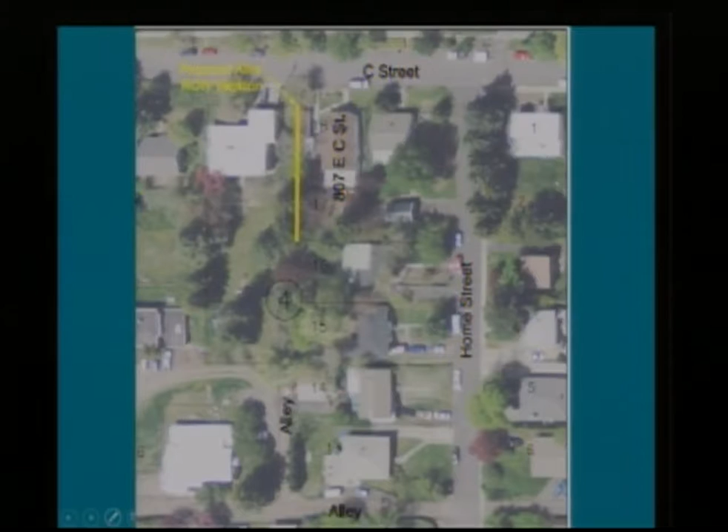At any rate, to the extent that this change would affect my property, I'm concerned. We also had a fire in one of the trees a few years ago.

I called the city. City called Avista, and there was a smoldering fire because one of the lines, the live wire, fell and set the tree on fire. Avista had to come out and repair that. With all their personnel, they needed the full extent of this right-of-way.

I'm concerned also that—I've met my neighbors and I like them very much, but I think this is not in the public interest. There's an historic reason why this right-of-way has existed.

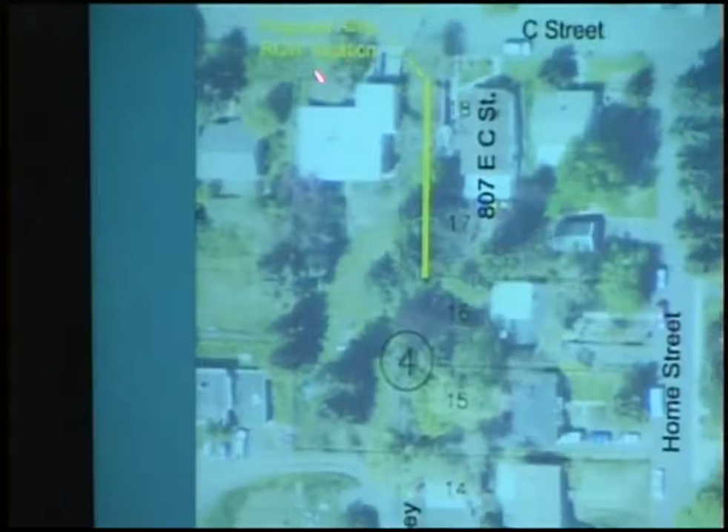Mr. Freeland, I'm going to stop you, sir, because we're over 4 minutes, but I do have a question to ask. Is that the property you're talking about that's yours? Yes, it is. So this is C Street? Yes. So you've got access to your house from the front of the street, isn't that correct? You have access to the front of that house right up there?

I do, yes. The question was about access—you said your lot goes way down into here, and that's what you're concerned about, these trees right here. Correct.

Also, in the lower basement of my home is the furnace, there's a kitchen. If those ever caught on fire, I need city personnel to be able to respond appropriately. Also, I've read the petition, and I'm concerned that this is really not in the public interest, but is unjust enrichment. I don't know if the city really has the legal...

Mr. Freeland, I'm going to ask you to stop. You've talked for over 5 minutes, and I restricted testimony to 3, so I gave you plenty of time, but I did have a question I wanted to ask you. Thank you, sir, for your testimony. I would be more than happy to take other testimony up front here.

Mr. Mayor, City Council, John Freeland. He's my dad—I grew up in that house there. I think the bigger issue here, beyond the city right-of-way, is that the lot right behind the house could potentially be divided for another house in the future. If their request was granted, I'm not sure that the alley could still be constructed.

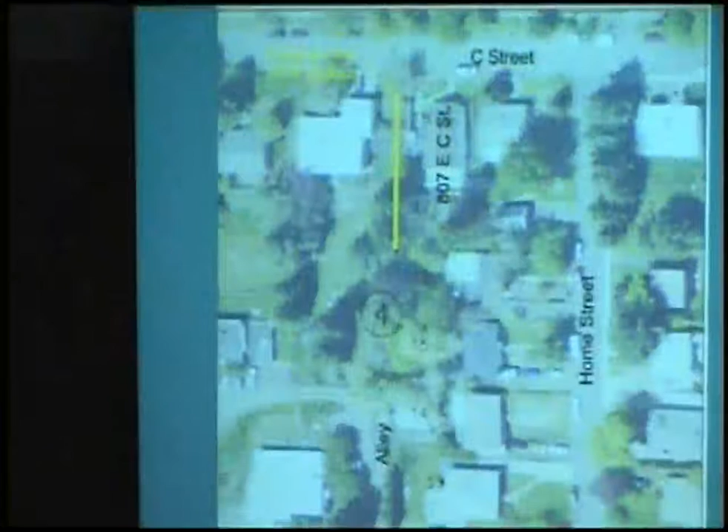You can kind of see the line there right before the gravel, 3/4 of the way down the picture there. And there's no fire hydrant anywhere near the southern part of the property. So in terms of fire access, for us to potentially seek to divide the property in the future and get value out of that piece of land, as the guy next door said, in a tight housing market, potentially building another house there, having a different property there. In terms of fire access, we need to have the alley preserved as it currently is.

So I would ask Les if, potentially, that 1 foot would restrict fire access to that property, and that might be a question for the new fire chief as well. So I just wanted to bring that up. I'm in opposition until I hear a good argument or my concerns are addressed. So thank you so much.

Thank you, John. Other testimony? Okay, I'll close the hearing. Oh, no, we have somebody coming. Come on up, ma'am, if you want to. Tell us your name and your address, please.

Hi, my name is Mary Ingles. My husband is Eric Milstead. So I'm petitioner on this request. Just a couple of points of clarification, I think, and perhaps this is really a question for Les. I believe that the access to the fire hydrant, that is city property that goes from the front of our property to the edge of the street. And so in my understanding, there would be no restriction or restricted access to that fire hydrant. Is that correct? Go ahead, Les.

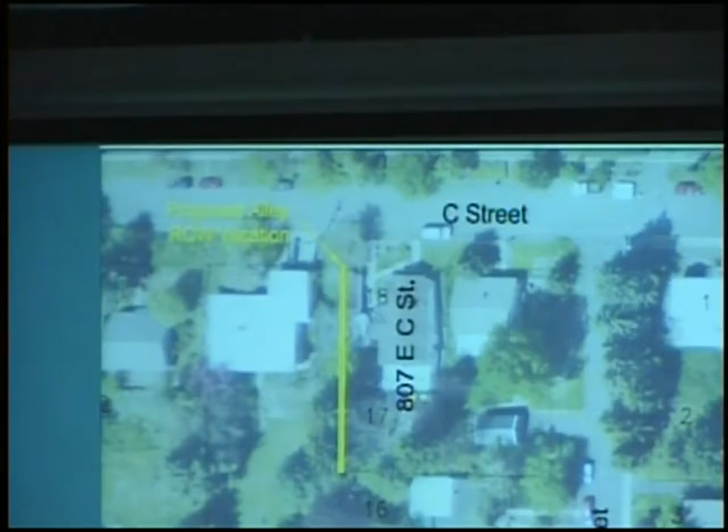Well, all those properties currently have fire access from C Street, and the fire truck could reach the majority of that property from C Street, and maybe using some of the alley for personnel, but not necessarily for fire vehicles to gain that access. So they have the access they are required to have. The question would be, if you develop something on the southern portion of that property, could you gain adequate fire access for the fire department to approve a new structure being placed there? Currently, under the fire code, that fire access has to be a minimum of 20 feet in width.

Okay, let's turn it over to the council. I just wanted to get a few of those things verified. Jim? I have a question for Bill.

If they were to divide this lot out and then provide access from down this way, the alley would not be suitable? It would have to be converted to a city street or city right-of-way? Correct. That would not satisfy the requirement of the lot having frontage on a public street. We did pass an amendment a few years ago to exempt out a few pre-existing legal non-conforming lots that only had alley access, but that did not grant the allowance of creating new lots that only had alley access.

So they would need to somehow accomplish that flagpole minimum 20 feet of frontage. It doesn't mean they couldn't develop on the rear portion of the property. In the R3 district, you can have multiple structures on that lot, but they just couldn't separate it and divide it off as a separate lot. And they may not be able to develop on that southern portion of the property unless they can provide adequate fire access in some form.

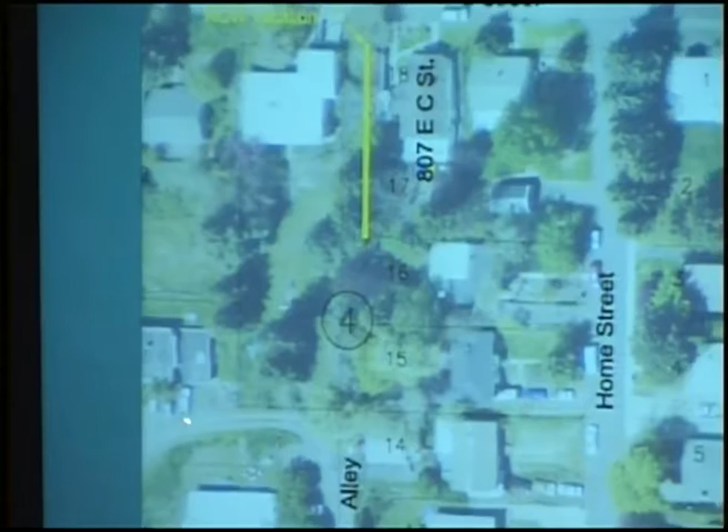How close is the fire access on this end? Well, one of the things to keep in mind here is what you see in this area. This is not an alley, this is all private. So the 16-foot alley we're looking at comes from C Street and extends all the way down to this intersection with an east-west alley here. That is the extent of the public right-of-way within the plat.

And there's a portion of this being used as a driveway, serving these couple of homes, that is gravel today. I'm not sure how much of that's actually in the alley right-of-way. Looks like it kind of drifts into this adjacent parcel here. So that would be the other access point to this alley, and potentially to a southern portion of this lot, where if fire service could come through here and possibly come some distance up this.

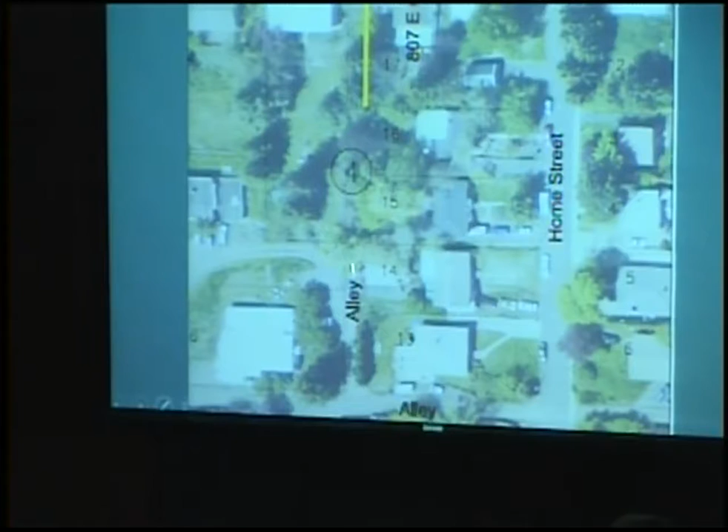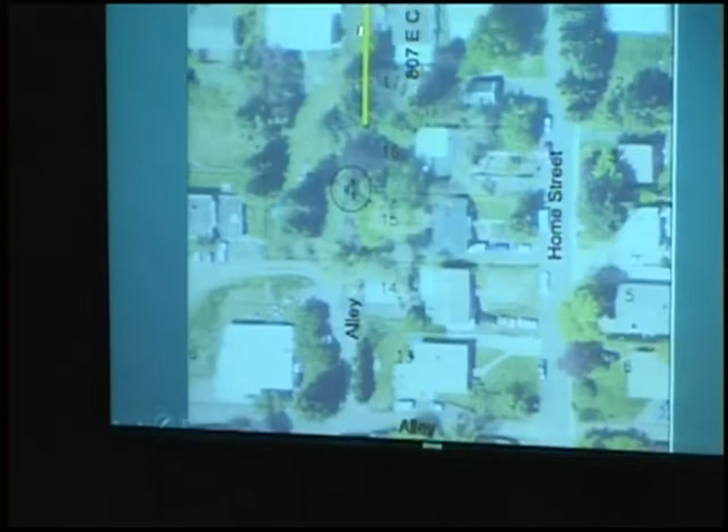I'm not as familiar with the topography down here, but I'm assuming since it's being used, it's probably not too steep compared to this pretty steep section right about here. So that would be the other closest point for potential fire truck access, if they could come in here, possibly up a little ways, and help cut that distance. Again, probably for personnel to go from the vehicle to the site, as would be the case here. You're not going to bring a vehicle down this area as it exists today.

Is the width of the alley down here the same, or is it wider down here? No, it's 16-foot right-of-way all the way through. All the way through? Yeah. Okay.

Okay, Bill, you mentioned that a flagpole lot can't be more than 150 feet long. Do you happen to know the plot size there? Well, the vacation request is 110 feet in length, is that correct? So that yellow line gives you the general reference, but I don't know the full length of that entire lot.

As I recall, each of these lots is 50 feet wide in a north-south direction, here, here, and here. And then the last one is 60, thus the 110-foot combination in that area. So from that point it would be approximately another 100 feet down to what I believe is their southerly property line, so it might be that 210 parcel feet in length overall, about 210.

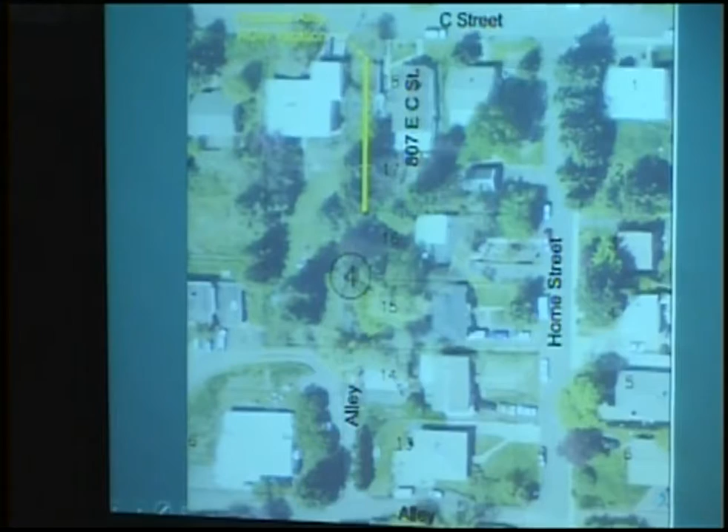Randy? So am I understanding correctly that currently they would not be permitted to build on the southern part of that lot, and the only way would be if that alley were to be converted to a city street at some point? Well, I would clarify, they could build on that southern portion if they could provide suitable fire access acceptable to the fire department.

So there is a difference between dividing it off as a separate lot for sale versus adding another structure on that existing lot. You couldn't divide another lot off for sale unless you could somehow get that minimum 20 feet of street frontage for that lot in a flagpole configuration. If you could not achieve that, you could place another structure on that lot. The R3 district does allow multiple structures per lot, but you could not get that new structure permitted unless the fire department approved adequate fire access to provide fire suppression services to it.

Right now, all we have is a 16-foot wide alley where the fire code would dictate that access needs to be 20 feet in width. So either the fire department would have to provide an exception or additional right-of-way would need to be obtained to have that 20-foot fire access width to serve that new structure.

And it appears that if they were to consider an exception, they may prefer the southern approach anyways. That's a possibility. That would be my perception, that just because of the topography, that would be the only feasible approach.

The difficulty you run into is you'll have a structure that will likely be addressed on C Street that is going to be gained off that rear alley. So that's where it makes it difficult, and really why lots need to have frontage on a public street, so if you're responding to an incident, they know where they're going and have access to that structure. But that does not mean access necessarily has to be gained by that street. The fire department would just have to be aware of that and have it in their response protocol.

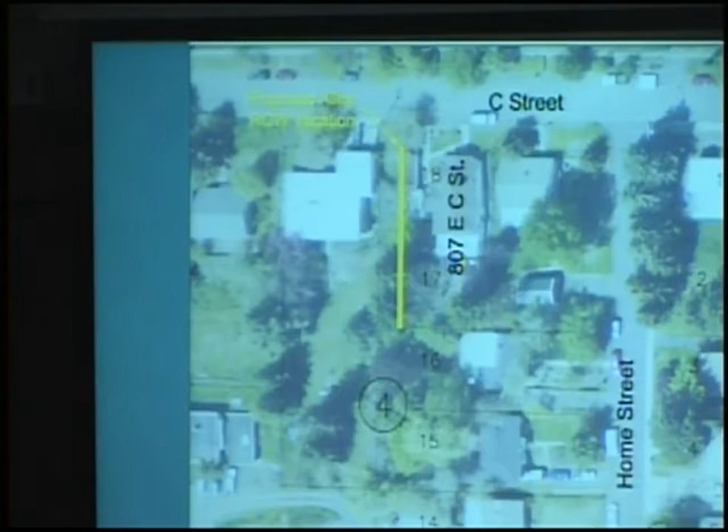Catherine? No questions? Ann? Okay. So how would council like to move forward with this?

I have one other question. Randy? Maybe it's kind of a long shot. I think we're all trying to come up with possibilities, if there are any others. More south of where they're requesting the vacation, in that portion of the alley, could it ever be a possibility in the future for there to be a vacation request for that entire portion to then become a 20-foot wide vacated portion? Well, you still run into the property right here, which is going to be problematic for you as well, Randy. See that line right there?

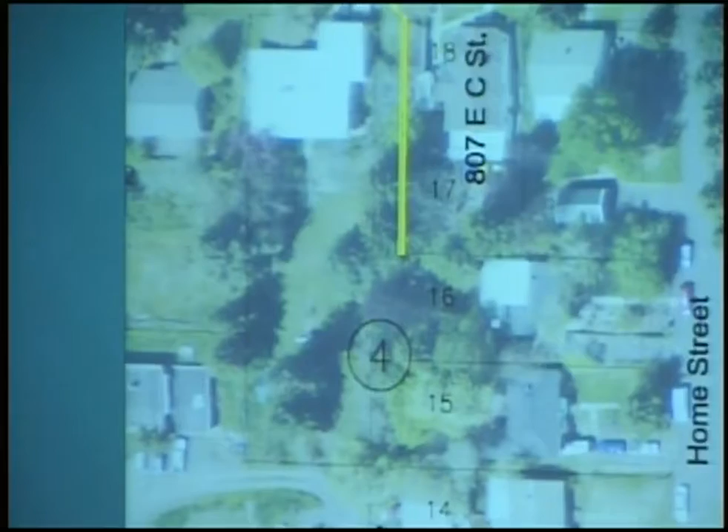Is your question, could there be an additional 4-foot dedication to allow for a 20-foot fire access? Right. There's always a potential that the adjoining property owner could purchase or obtain another 4 feet. Right, that's what I'm asking. And then it would all depend on how they were going to configure it, what the access was, and so on and so forth.

Well, Mr. Mayor, since the existing right-of-way does not meet fire code at this point, and another foot taken off of it doesn't make any difference, I guess I would have to move that we approve the vacation request by adoption of the draft ordinance under suspension of the rules requiring 3 complete and separate readings, and that the ordinance be read by title and published by summary.

Second, with just the correction in the ordinance, is it west or east? Because I heard it's west. Okay, so in the ordinance it says east, I think.

We got a motion by Jim and a second by Catherine to approve the vacation request by the adoption of the draft ordinance under suspension of the rules requiring 3 complete and separate readings, and the ordinance be read by title and published by summary, as long as it's on the west, and I'll take a look at that ordinance on page 10.

We'll start the roll with Ann. Aye. Aye. Aye. Aye. Okay, the vacation is granted.

Let me read this ordinance. This is ordinance number 2018-1. An ordinance of the City of Moscow, a municipal corporation of the state of Idaho, providing for the vacation of a portion of the public alley right-of-way within the City of Moscow legally described in Section 1 of this ordinance, providing that the title of said vacated right-of-way shall vest with the owners of the property as specified in Section 3 of this ordinance, and providing that this ordinance shall be in full force and effect from and after passage, approval, and publication according to law.

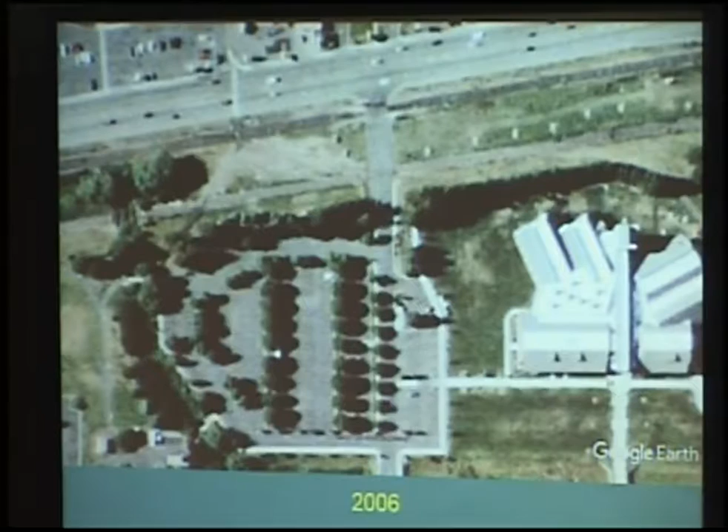And then the university, in conjunction with the U.S. Army Corps of Engineers, reconstructed Paradise Creek here, essentially creating an open channel to complement the underground portion of the creek that runs along Paradise Creek Street down here off the edge of the screen.

And with that, and about the same time, Stadium Way was extended up to the highway, new bridges installed, a new intersection at Peterson and Stadium Way and State 8. And then Rayburn Street, as it existed all those years, was removed.

So the only thing that's still there today, you can just see it right there, that little line crossing, that's a sanitary sewer main that the city owns that crosses from north to south and ties into a big sewer system that runs right through this area.

And so with the creek, then all the crossings went away, the road went away, the pedestrian routes all went away, and that is just a creek. So that's generally, it's 2015, it's the last aerial I had. That is what it looks like generally today.

Vegetation is starting to come to fruition along the corridor. You can still see that sewer line just barely right there. Just to help orient, Wendy's is right here across the way. Drive in, drive out.

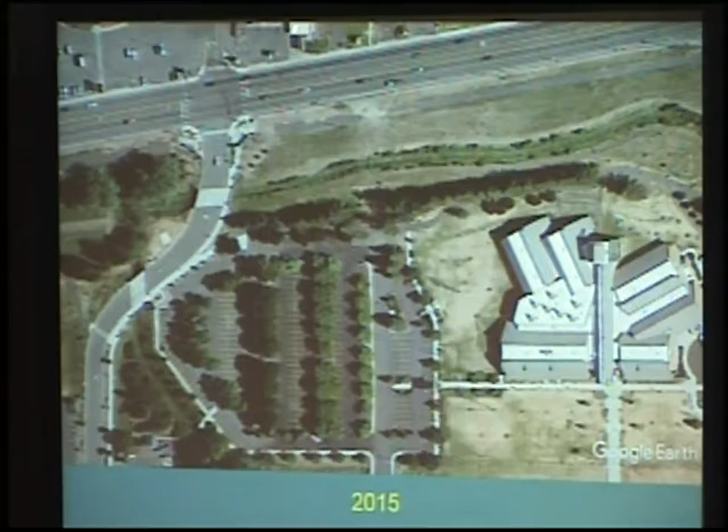And the city acquired this some years ago as the railroad started phasing out, so that it became right-of-way. So the university has requested that we vacate that area. In this case, the university now owns both pieces of right-of-way, the westerly one here, the easterly one here, that abut the right-of-way area on both east and west sides in its entirety. So they own all the property east, west, and south of this right-of-way vacation. To the north, of course, is additional right-of-way for State Highway 8.

So the university is making the request, as they anticipated the city probably has no further need of this for a roadway, that we vacate it. And again, the draft ordinance does retain easements upon the right-of-way for the purpose of utilities.

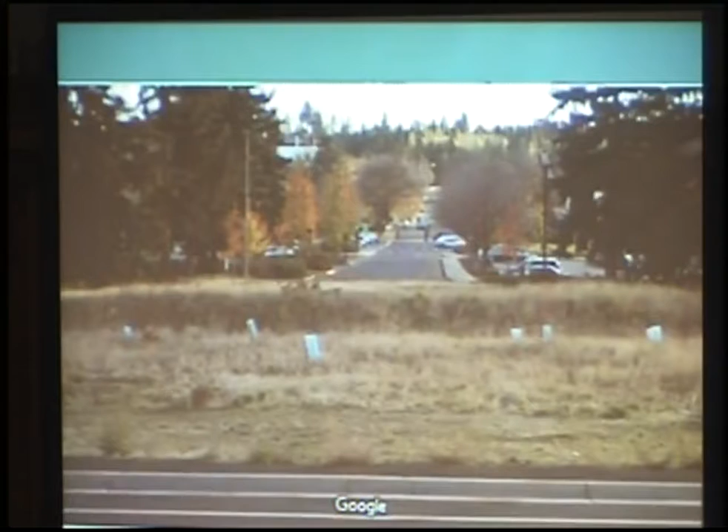Okay, I think we'll go ahead and, oh, were you done, Les? I'm sorry, I forgot I had this one. That was just a rough representation of where that right-of-way would be, before, give or take. So, yeah, that was it.

How much land is it? Ooh, we'll have to look at that. It's actually in the ordinance, in the legal description, right at the bottom. About .31 acres, roughly. Thank you. So a third, a little less than a third. Okay.

I will open the public hearing at 7:44, and Mr. Dan Ewert is here, so the applicant, so please come up and share with us what the university's thoughts are. Dan?

Mr. Mayor, council members, good evening. My name is Dan Ewert. I'm the Vice President for Information Technology at the University of Idaho, and I live at 2187 Westview Drive.

I think Les did a great job of describing what we're requesting. We would hate to see the good work between the city and other groups and us in the development of the riparian zone through there, in the pathway process, ever become a street. I don't think we need that to be a street anymore with the great improvements there on Stadium Drive. And of course, we'd be glad to support any utility easements and those kinds of things as appropriate.

But like I said, I think Les did a great job of describing it, and I'm here to answer any questions that you might have from the university perspective. Any questions for Dan, from anybody? Thanks, Dan. I think everybody's, oh, you got something, Jim? I just wondered if the university has any development ideas for that since it would be a continuous piece now?

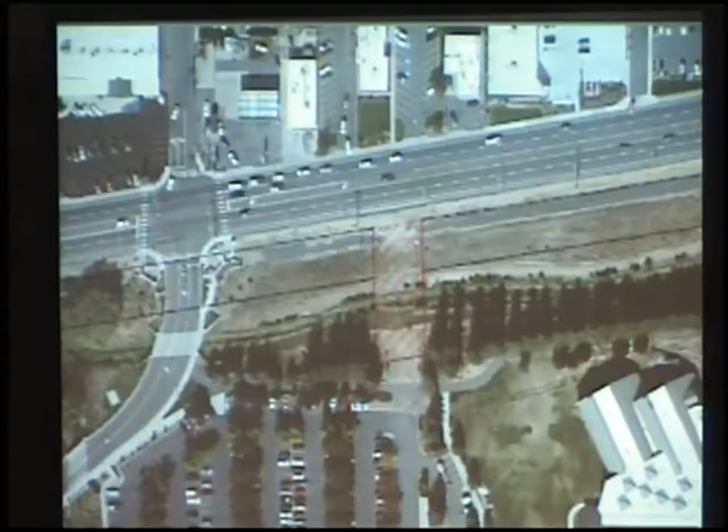So it's not something that the city of Moscow would have control over in terms of access off the highway. Catherine, questions? Okay, Gina? I'm good.

Well, I move we approve the vacation request by adoption of the draft ordinance under suspension of the rules requiring 3 complete and separate readings, and that the ordinance be read by title and published by summary. Second. Okay, we have a motion by Catherine, a second by Gina to approve the vacation request by adoption of the draft ordinance under suspension of the rules requiring 3 complete and separate readings, and that the ordinance be read by title and published by summary.

I'll start the roll with Brandy. Aye. Aye. Aye. Aye. Aye.

Okay, now I will read this ordinance, which is 2018-02, an ordinance of the City of Moscow, a municipal corporation of the state of Idaho, providing for the vacation of a portion of public street right-of-way located within the City of Moscow and legally described in Section 1 of this ordinance, providing that the title to said vacated public right-of-way shall vest with the owners of the property as specified in Section 3 of this ordinance, and providing that this ordinance shall be in full force and effect from and after passage, approval, and publication according to law.

So there it is. Now we will move on to item number 8, and this is a little bit interesting one. Before you get going, Bill, I want to chat for a minute about this because there are 3 actual actions that need to take place here. If you read in your packet, A, B, and C—C being the public hearing—so we have to come to a conclusion on A and B before we can make a decision on the public hearing and opening, because if we don't have those, the public hearing cannot happen. Is that correct, Gary?

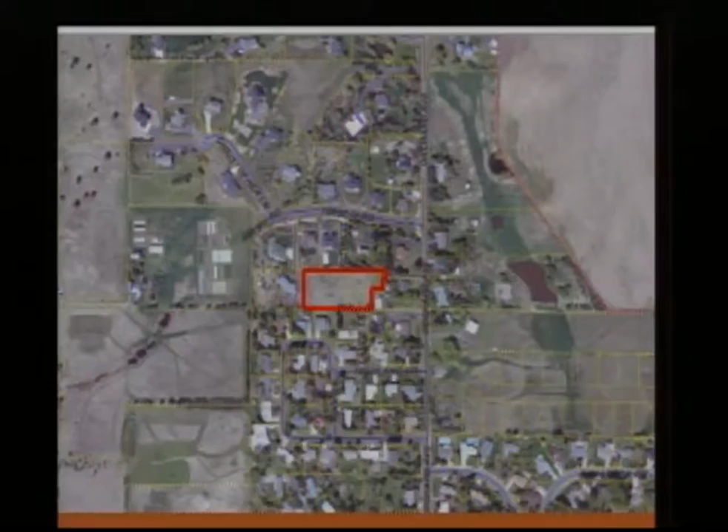So this is the property in question that we're talking about. Orchard Avenue is located here to the east of the property, and Hershey Road is located to the north, and then we have the Highland Drive loop, and then a short stub street called Lande Lane that abuts up to the south of the property.

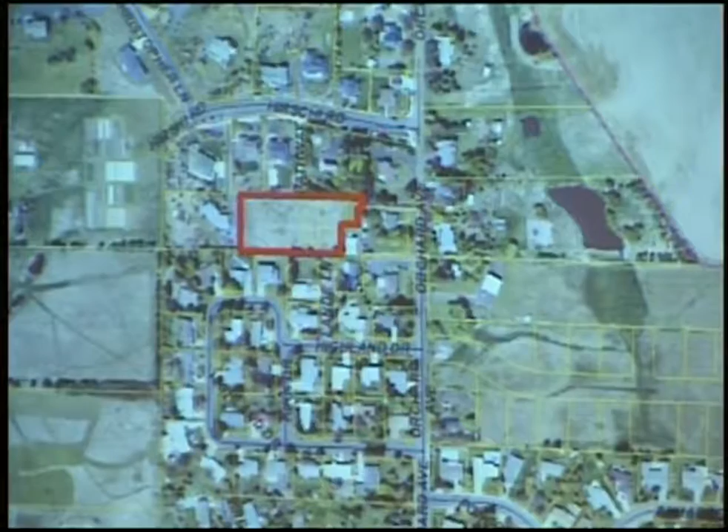The property itself is located within the R2 zoning district, which is our medium-density, single-family residential zone. Most of the properties to the northwest here and to the south are also zoned R2. We have some farm ranch outdoor recreation just to the northwest and to the west of the property, some R1 to the far southeast, some suburban residential for the majority of the Christopher Crossing subdivision located to the north, and some ag forest district off to the west.

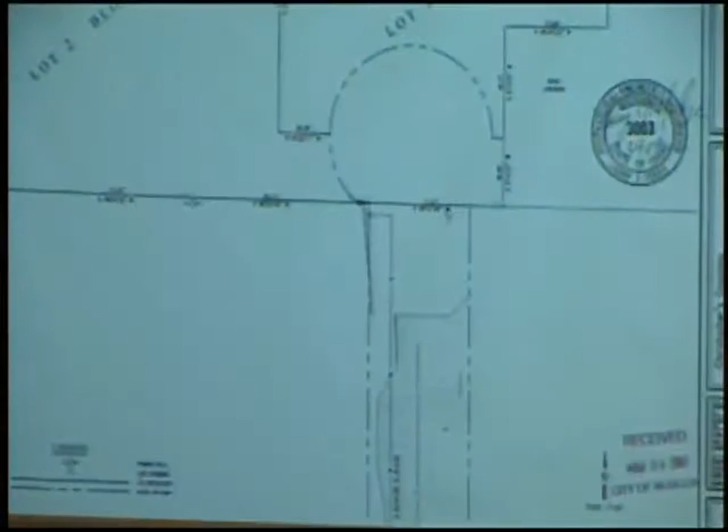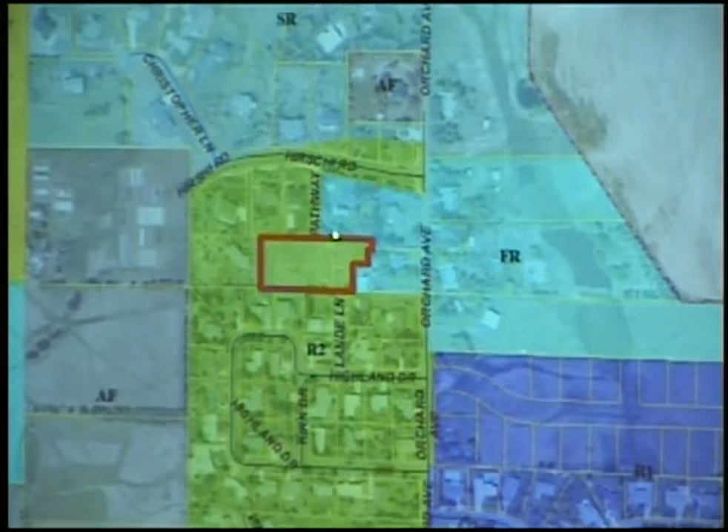Now, this property was a part of the Christopher Crossing subdivision. That subdivision included the lots off of Christopher Lane and Hershey, a few lots in the south, and this was a portion that was tied to that overall subdivision plat when it was developed back in 2000. It ran into some financial difficulties, and that portion of the plat was never completed. The public improvements were completed for the rest of the subdivision, but this little portion was not.

It was proposed to be accessed off the end of Lande Lane, with a cul-de-sac to be constructed at the end of Lande, and there were two lots platted on that portion of the property. Shortly after that was platted in 2000 and the subdivision was completed, this became a property that was difficult to complete. There are some utility lines and grade issues that necessitated retaining walls on the side of the cul-de-sac. The developer at that time and future developers identified that it really was not financially viable to develop that property given all those constraints.

There also are both storm and sanitary sewer lines that need to be extended up Lande from Highland Drive to serve the lots. So there was a lot of development costs and challenges, and developing in just a two-lot configuration was not deemed financially viable.

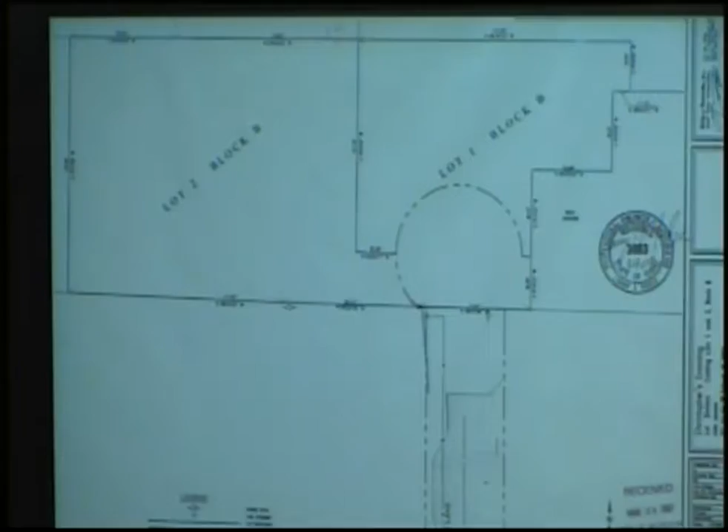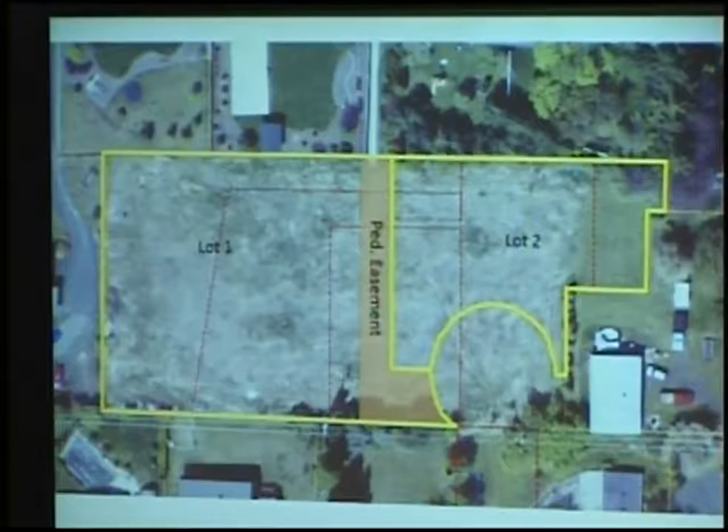In addition to the two lots that were platted, there was also a pedestrian easement that was granted. There is a pedestrian walkway and sidewalk constructed from the street to the north to the northern boundary of this property. An easement was granted to allow that pedestrian path to cross the property, reach the Lande Lane right-of-way, and continue south towards Highland Drive.

After that was determined to be not feasible for development in its current configuration, in 2007 the city was approached with a proposed lot division that would take the two lots and convert them into three. That proposal modified the cul-de-sac to extend the roadway farther north into the property to get away from the utility lines and grade issues, placing the cul-de-sac in a modified configuration located farther north into the property.

There were two flagpole lots that were going to gain access at the northern end of that cul-de-sac, and then a third lot located a little bit farther to the south. So these were proposed to be the three building lots in that configuration. There was also a remnant parcel located on the east side of the proposed cul-de-sac, and the discussion at that time was that it was likely going to be sold to adjacent property owners located to the east of the proposed cul-de-sac. That was approved by the council in 2007.

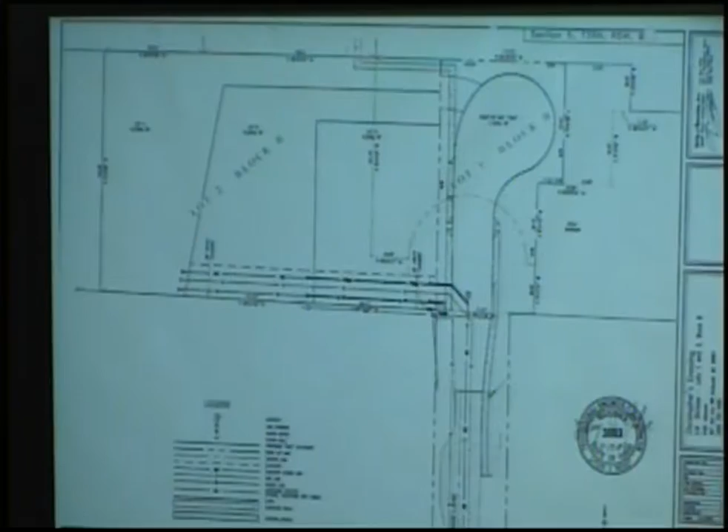There were a number of conditions. One included rerouting that pedestrian easement to allow for continued connectivity of that sidewalk down to Landy Lane. That was approved in 2007 and has really just sat since that time. So this was the configuration that resulted from that lot division: these were the three lots that were approved, and this was that remnant parcel.

There was a pedestrian easement granted here along the northerly property line to provide a pedestrian route to the proposed new right-of-way. New right-of-way was dedicated beyond the prior cul-de-sac to allow for that construction, and there was a small vacation on the side of that cul-de-sac previously platted in the Christopher's Crossing subdivision. So that's how it stands from the last approval. Legally, we have this property in private ownership, this in private ownership, and this right-of-way and pedestrian easement exist today.

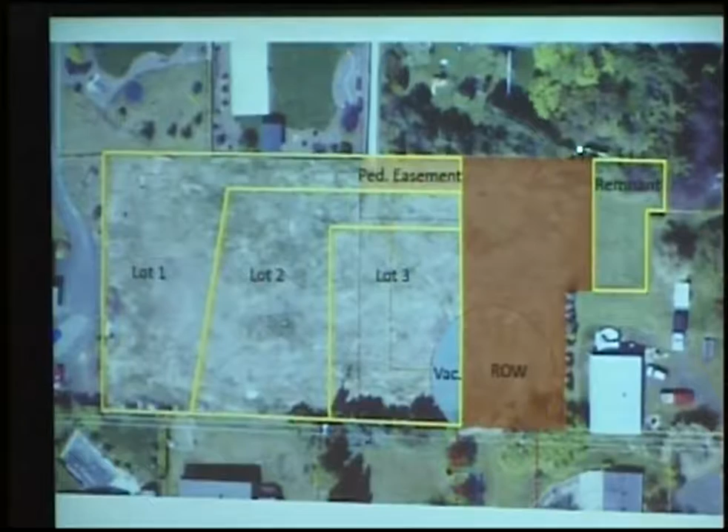The proposal before you this evening is to modify that again, to reconfigure it into 4 building lots with an alternate hammerhead turnaround. That is something the current owner of the property feels will fit the site and make it much more economically viable to develop.

There would be 4 individual building lots, a little more regular in shape, not quite the flag lots that existed previously. The remnant portion located on the east side of the prior cul-de-sac, the request is to vacate right-of-way. That would be added to this property, resulting in a building lot.

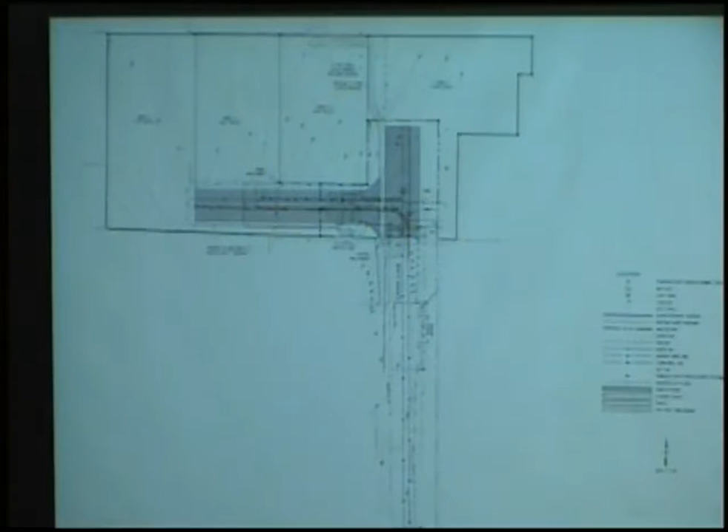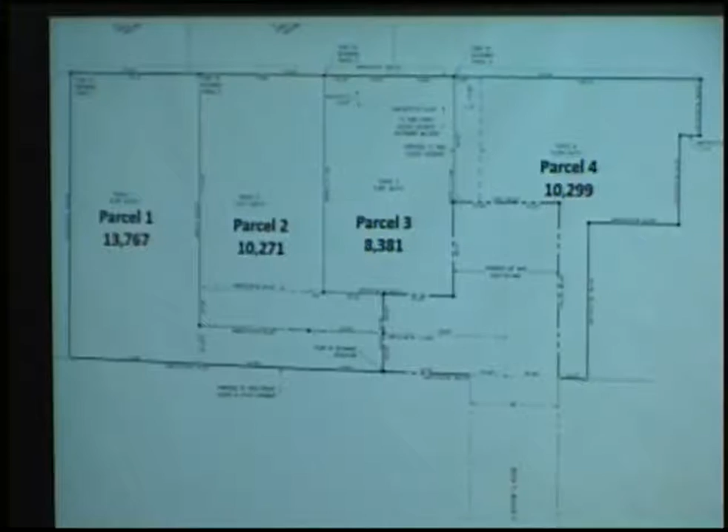Looking more closely, there are 4 building parcels proposed, ranging from a little over 8,000 square feet to about 13,700 square feet in size, all well within the required 7,000 square foot minimum lot size. This plus area is the proposed right-of-way dedication to accommodate the hammerhead turnaround.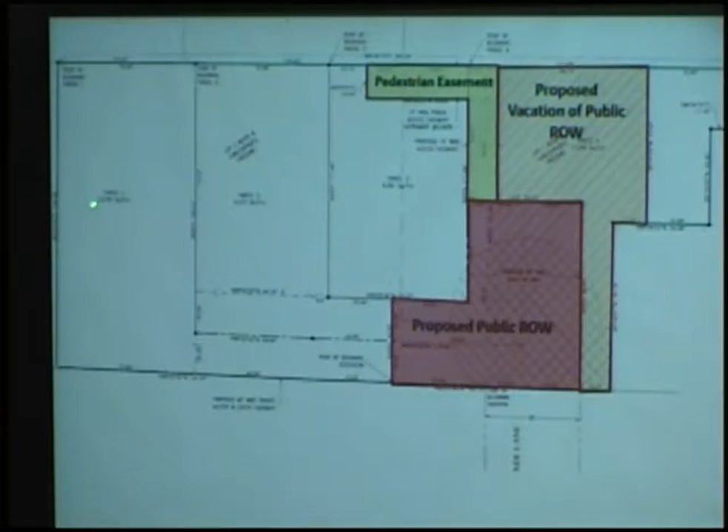The area in the tan shading is the area requested for vacation, to be added to the remnant parcel to create the 4th building lot. And again, the 3 lots that would exist on the west side of the property.

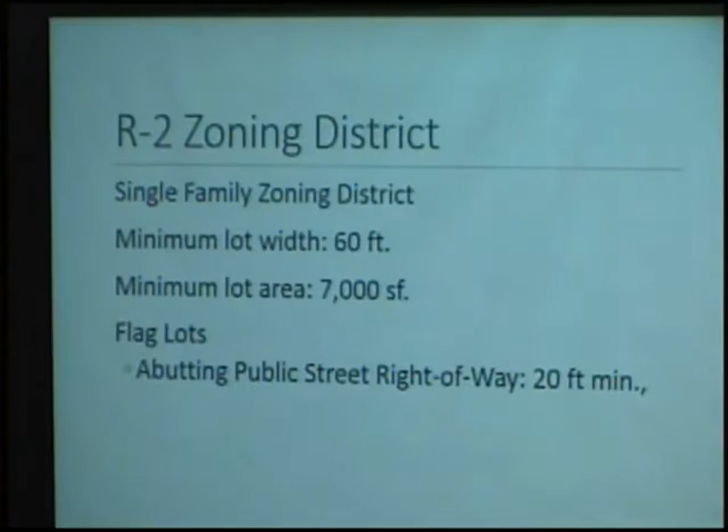This is zoned R2, the single-family zoning district. The minimum lot width is 60 feet, minimum lot area is 7,000 square feet. For flagpole lots, and the 2 westernmost parcels are flagpoles. They're required to abut the public street right-of-way for a minimum distance of 20 feet, with a maximum length of 150 feet.

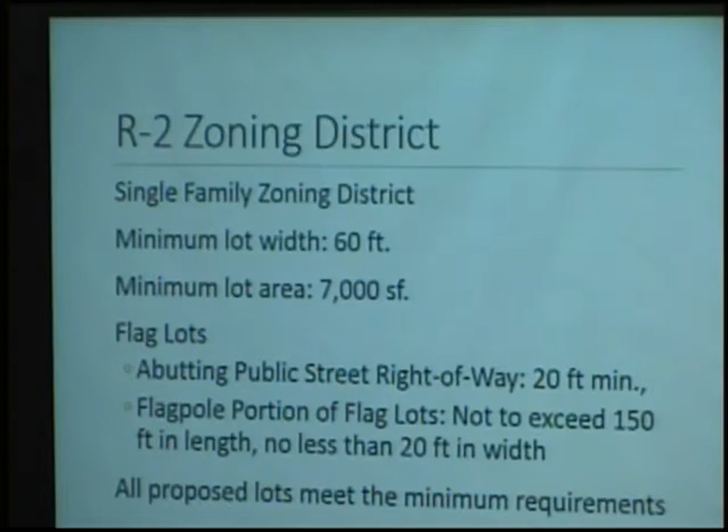All proposed lots in this configuration meet all minimum requirements specified in the zoning code. This request was reviewed by the Public Works Finance Committee at their February 12th meeting, where the committee recommended approval of the lot division itself. The other items are before the full council for their consideration.

Staff's recommendation this evening is to approve the lot division request with 4 specific conditions. The first is that the vacation of the right-of-way and the engineering variance are approved by the City Council. Without those, this doesn't function, this does not work.

The second condition is that the applicant dedicates the additional right-of-way necessary for the proposed hammerhead turnaround configuration. There is some right-of-way that needs to be dedicated to the west of the existing right-of-way dedication to make that occur and provide for that public turnaround.

Third, that the applicant grants an additional 15-foot wide pedestrian easement between lots 3 and 4 to allow for continuation of the existing easement south to the new proposed right-of-way boundary.

And the fourth condition is that all public improvements are constructed, including the pedestrian walk through the easement, or the developer enters into a development agreement with security posted to secure those improvements prior to any building permits being issued upon the subject property. So with that, that ends my presentation, and I'd be happy to answer any questions the council may have.

I remember in 2000 when I was on planning and zoning for the first time, we heard this, and people have been trying to make this thing work for almost 2 decades that I know of, because I was on council in 2007 at that time, Bill. But I'll turn it over to council here. What are your questions for Bill?

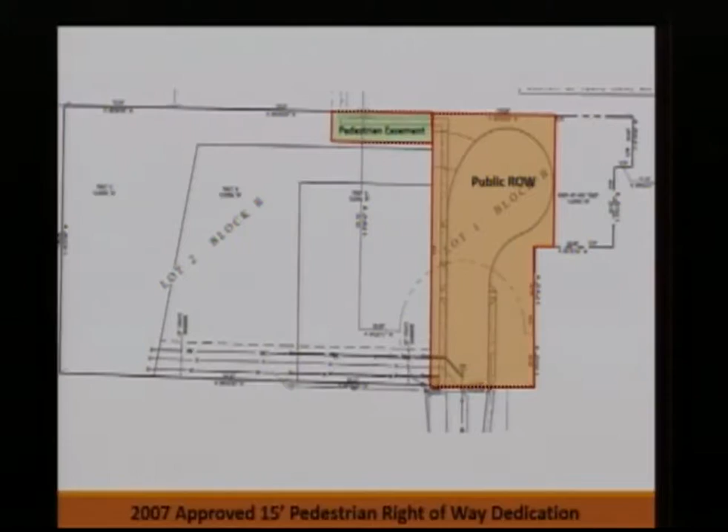Gina, I had a question about the hammerhead turn, or hammerhead turnaround, whatever you called it. That's on B, I need to wait. Well, because we're going to talk about that next. We're going to deal with A first. Okay.

Anybody want to make a motion on this, on the 4 conditions? Sure, I would move that we accept the lot division, including the 4 conditions listed on the screen. Second. Okay, we have a motion by Jim and a second by Catherine to approve the lot division with these 4 requirements and conditions.

Can we ask a question about condition number 4, where it says the developer enters into a development agreement? Do we do that often? Sure, there are 2 options. It's a very typical form.

Sometimes the sequencing of a development doesn't make sense to complete the public improvements before certain phases of construction of the buildings, so that's always an option they could present, that they'd like to obtain a building permit before completing all the public improvements. If they chose to do that, we would bring a development agreement before the council. It would identify the public improvements they're required to complete, a value for that, and a security amount, and they would have to provide that security, allowing the building permits to be issued. It also gives them a specified time frame to complete those public improvements, typically 9 to 12 months. Thank you.

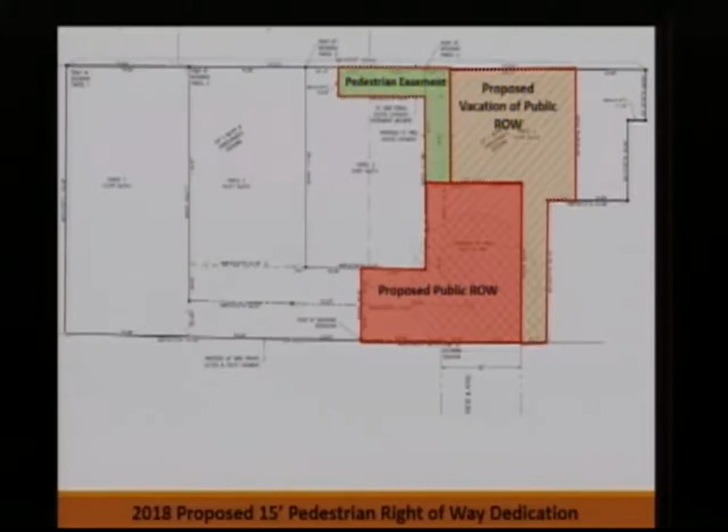At the Public Works meeting, I remember a woman in the Hershey development asking if that pedestrian easement was going to connect to the end of the existing sidewalk there, and I believe Les said that would be a connection. Correct? Okay, thank you. Yeah, that easement ties into the existing sidewalk, located to the north. On this diagram, the sidewalk ends right here. This is the existing 20-foot pedestrian and utility easement that heads north, so that sidewalk terminates right here, and it would pick up, turn around, and come down.

Okay, we all good? We have a motion and a second. Everybody understand what we're doing here? I'll start the roll with Ann. Aye. Aye. Aye. Aye. Okay, we got A, then let's move on to B with the street standards that allow the hammerhead turnaround.

Is Les presenting that one, or are you doing that, Bill? Yes, sir.

Hi, Les. Hello again. The second item on the list for this particular development, as Bill explained, is the variance to the street standards. As he noted, the cul-de-sac is our typical street standard, and we're referring to the drawings within the city council adopted standard construction drawings. That's what we're referring to, and these specify how things that are going to be public facilities must be constructed. Within that is this particular plan set for cul-de-sac details, which lays out the requirements for cul-de-sacs.

This is a fairly new standard compared to what it used to be for many years. We used to allow different sizes of cul-de-sacs and different configurations of public turnaround on the end of a public street. That all pretty much went away with the standards we adopted starting back around 2014. This is what is currently still in place today, which is a cul-de-sac that has a 40-foot radius, an 80-foot diameter within the curb line.

Then it's got 5-foot walks all the way around the outside, getting up to 90 feet of diameter. There's a paver block strip behind the sidewalk that's really just an overhang for the bumper of the fire truck when it's going around in the circle. Overall it works out to about 98 feet in diameter, much larger than what was in the original plat for Christopher's Crossing back in 2000. It's certainly a lot bigger than anything they'd be able to build in that location today.

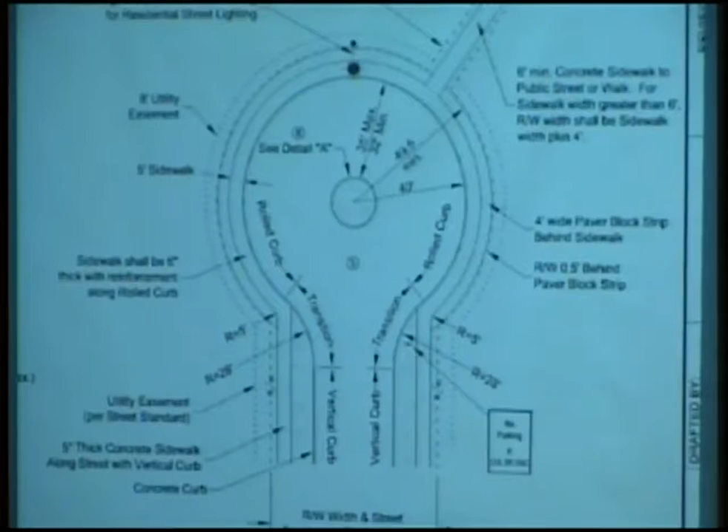So what the standards did when we made the change in 2014 is the hammerhead options went away in terms of permanent public facilities. And the reason for that was we felt that the cul-de-sac was a better option. It provided better access to all the properties, gave better lot frontage on the properties, better for snow removal, general fire turnaround.

But there are occasions when the hammerhead does fit the topography and the site configuration better, and this is probably a good example of that. So the request being made is to allow a permanent public turnaround that is consistent essentially with our temporary turnarounds that are in our current standards. That's what these three represent.

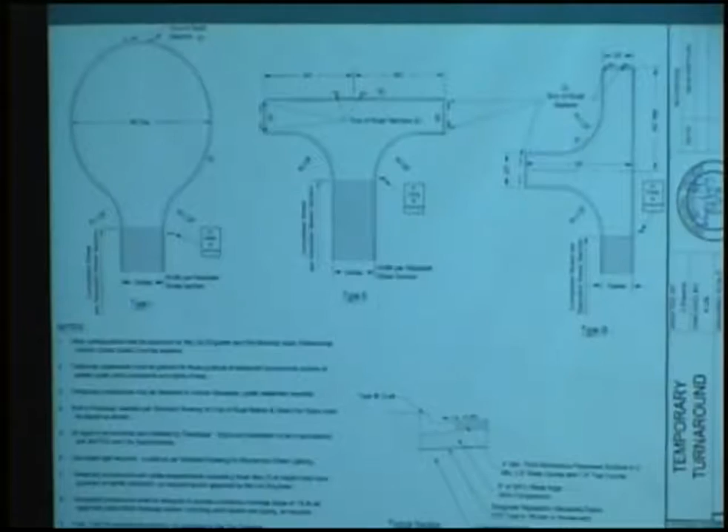The temporary turnarounds are typically placed at the end of a paved roadway, the darker gray here, where say you're at the end of a subdivision, and we anticipate that road will be extended in the future. So for the meantime, it may be a year, it may be 10 years, you end up with some kind of a temporary turnaround for the public, the fire trucks, the garbage truck, everybody else, to be able to make the U-turn and head back the way they came on the public street.

Otherwise you just end up with this little stubby dead end, kind of like we have at the end of Lande right now, and there's nowhere to turn around except in somebody's driveway. So the temporary turnarounds are still in the standards with all these different configurations for that reason.

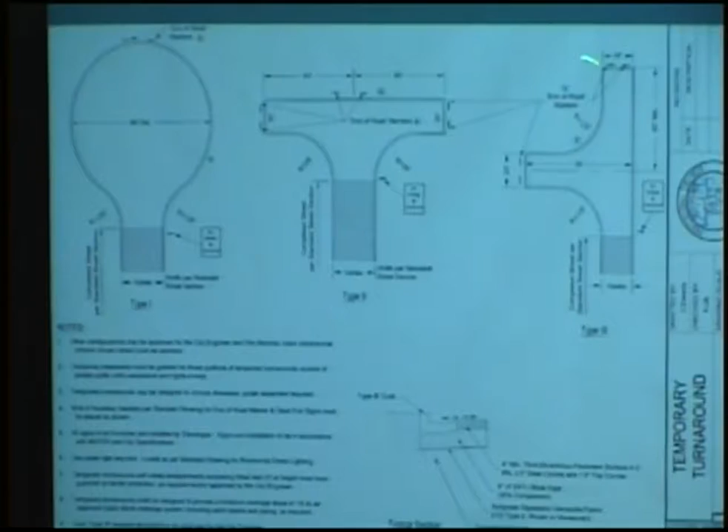The one that essentially we're trying to meet here, the applicant is trying to meet, is this one shown on the right. Zooming in a bit, you can see it has a 20-foot wide lane width. It's a 70-foot deep T, if you will, and 60 feet each way as a minimum to allow a fire truck to make that motion and make the turnaround—fire truck, bus, garbage truck, whatever it may be.

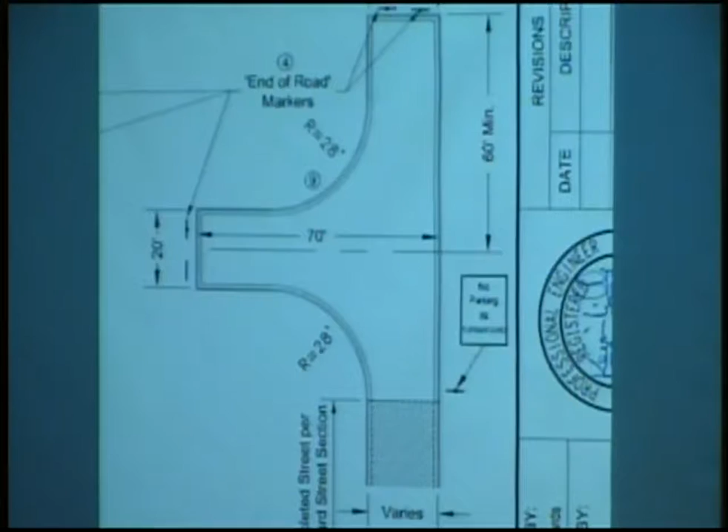So the proposal before you in the lot division incorporates this style of turnaround. They're actually proposing, instead of 20 feet wide, that it be 28 feet, which is the minimum allowed public street width on a dead-end street under the current city standards. That's the only place we allow the 28-foot anymore, where there's really no opportunity for that street to be extended in the future, and that is the case in this particular situation.

So they are proposing, instead of 20, to use the 28, so it meets our minimum street requirement for width, but then also using the hammerhead in lieu of the standard cul-de-sac. So the variance before you is a variance from the adopted standard details and construction drawings that require a cul-de-sac, and in lieu of that, allow the use of the hammerhead style turnaround.

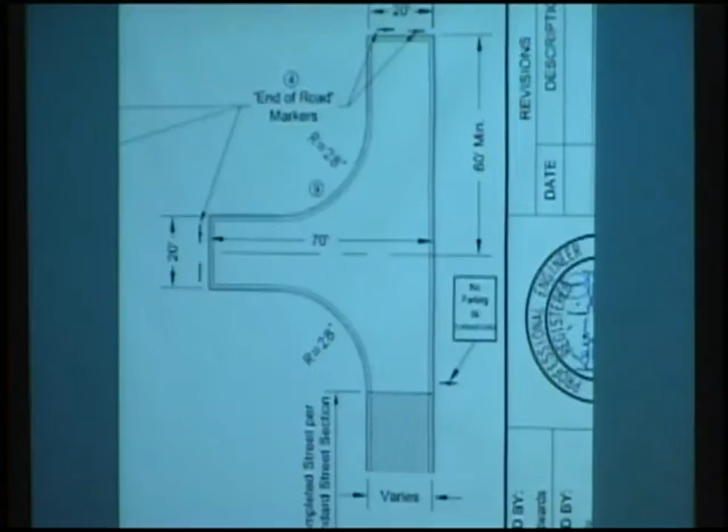You had a question, Gina, on hammerheads. I think Les answered it. Okay, right on. Other questions for Les? Pretty straightforward.

Brandon asked, in Public Works there was discussion too, asking how the fire department feels about this, and if you would like to just respond to that. Certainly the standards as they exist today were all vetted through the fire department when they were adopted back in 2014. So the temporary turnarounds, the cul-de-sacs, the hammerheads as we're discussing here, all of those went through the fire department at that time and they were comfortable with those standards. In fact some of them got bigger, such as the cul-de-sac, as part of that review process by the fire department. So these have met with their concurrence at the time that they were adopted.

I move to approve the variance request to build a permanent type 3 turnaround per standard construction drawing number 5. But is it temporary standard construction? Because that's what it said on the side. Permanent turnaround, meeting the minimum standard for a temporary turnaround, sizing-wise. Okay, so that's okay in there? Okay, for drawing 5, yeah.

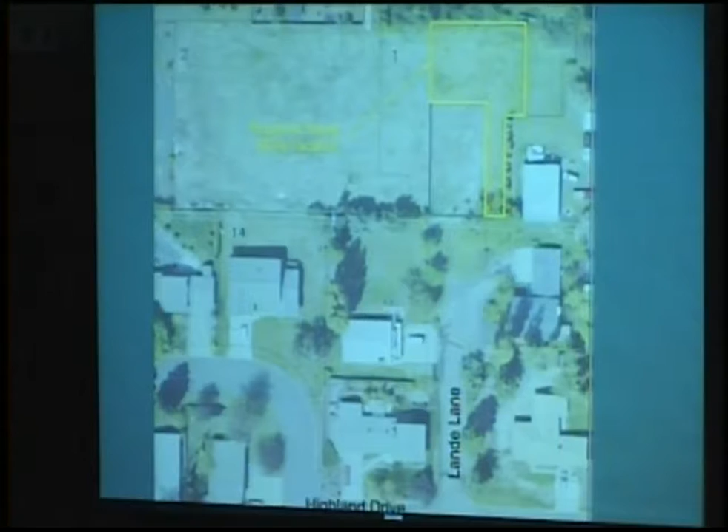The area being requested for vacation is shown here in the yellow hatched area. As you recall from Bill's presentation, there's that little remnant parcel off to the east. This is all existing right-of-way through here today, and then those other 3 lots, as they were done in 2007, are there to the west. Again, taking you back to the origins with a little different graphics, just to help everybody understand exactly how we got to where we are and what is being requested, because we want to make sure it's very clear.

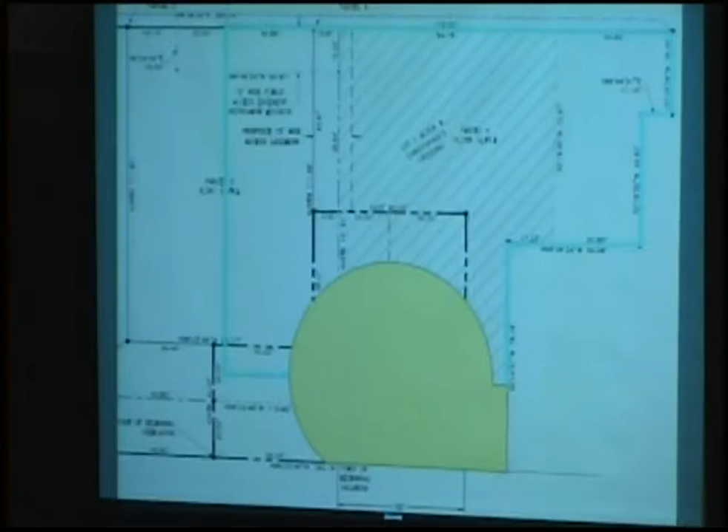So we go back to where we started back in 2000 with the original cul-de-sac. Then in 2007, when we went to the 3-lot configuration, we vacated this westerly slice in order to make ground for those 3 lots, but then obtained, through dedication, this additional space for right-of-way. So that is the configuration of right-of-way that we have right now: lots off to the west, the 3 lots, and that remnant there to the east.

So that's the quick and easy version. Again, the request at this point is for vacation of this area in green of the existing right-of-way. The combination of the gray and the green is the current existing right-of-way, but the green would be the area being requested for vacation by the applicant.

Okay, we'll go on to part 2. Okay, thank you, I wasn't going to talk about that, but I figured somebody might ask the question. So as Bill talked about, the original plat included a sidewalk easement that came down through here.

The current sidewalk exists to this point right here, and then there was easement dedicated down to the cul-de-sac to the public right-of-way. So that combination gave a route from Lande Lane all the way through to Hershey.

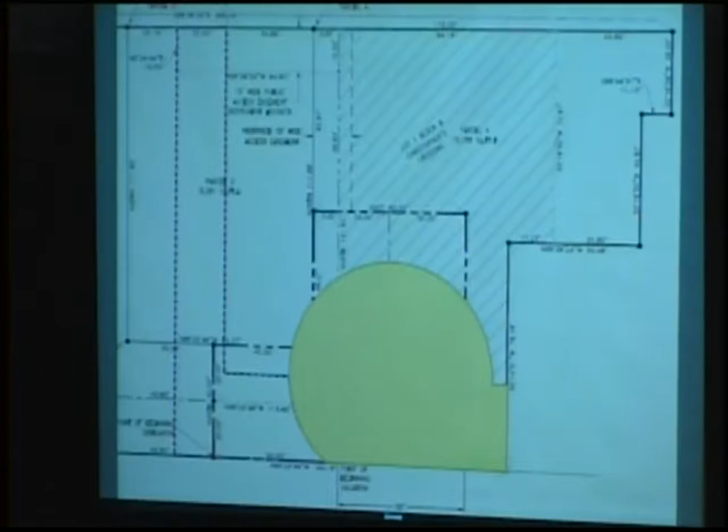Then with the change that occurred in 2007, we got rid of some of that, and so here's the new right-of-way. This was all going to be lot development, so what happens to that route? What they did is they granted us that easement right there to make the connection from the existing system into the new right-of-way. So that became the corridor then, coming from the north, across that easement and down through there.

Today, again, we're looking at vacation here, dedication here, and ultimately that gives us this configuration. So that vacation is in this kind of diagonal hatch here, and that extends to this line. But what is being required as part of the lot division is that they give us a dedication in those green dash lines, a little hard to see, but that's 15 feet wide.

And the reason that there's an overlap here is essentially that they were working with that proposed property line and then going 15 feet east of that. That happened to overlap a little bit of the vacation that's being considered this evening.

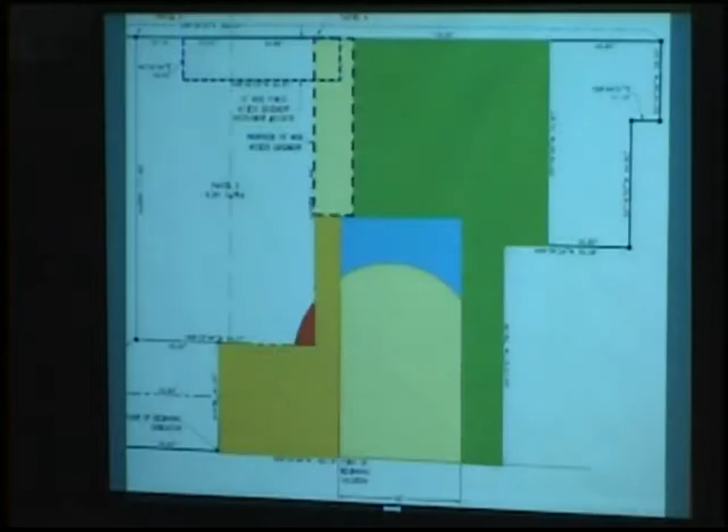Okay, any other questions for Les before I open the public hearing? Thank you, I knew you had anticipated it. Can you go back to showing all 4 lots, like the whole picture, for a moment? This one, or the entire subdivision? The entire thing. That one.

So I see where you're talking about the sidewalk up there. Is there any sidewalk in front of these two southerly lots, the little pieces there? Yeah, in here? What happens at the end of that hammerhead? Is it just there, the driveway?

There would be sidewalk coming through, and it would come down and come along the westerly side of this north leg of the hammerhead, and then on through, crossing a street, in essence, to the south. I don't believe there's any proposal at this point to bring sidewalk all the way around.

Oh, that's versus just a teeny crossing over and then continuing on. That's a small flagpole, and this is just a little bit deeper flagpole. Most likely, this will end up being a shared driveway out through here, as their access to the public right-of-way, and then jumping onto the sidewalk system running north-south through here.

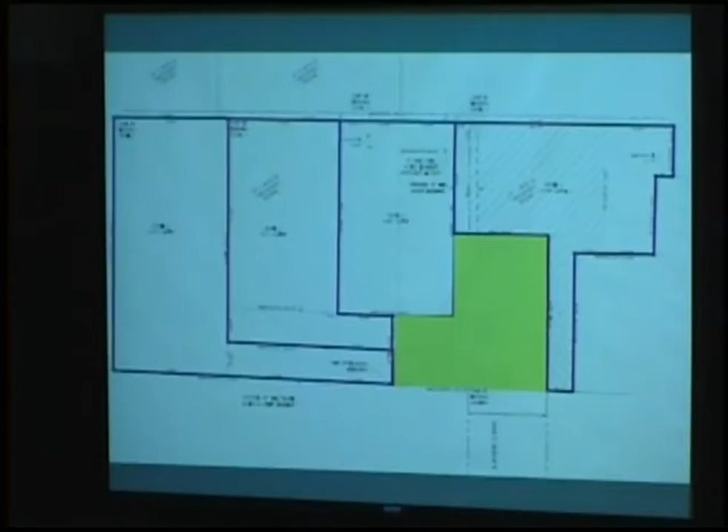I'd like to hear from the applicant, please. As with all public hearings, please state your name and address. Good evening, Your Honor, Council. I'm Scott Becker with Hodge & Associates, 405 South Washington, and I'm representing the applicant, who's also here.

I just want to thank staff for the excellent job they've done. They laid it out very well. I don't want to muddy the water, but I'll certainly answer any questions that you might have, as long as my voice holds out. Questions for Scott? I think we're good right now. If something comes up, Scott, we'll bring it back up.

I would like to hear from other folks who would like to testify before us. I need to make sure that I disclose, at Public Works and Finance, that I live on Highland. Any other folks want to testify on this? Going once, twice, seeing none, I'm going to close the hearing at 8:17.

And, Catherine, you live real close to there, so is that a conflict of interest for you, Catherine? No, I just was, because I live on Highland and that comes out to Highland, I'm on that circle. I was told that I should clarify that. Okay, good enough. See any issue with that, Gary? No, sir, as long as there's no financial interest, there should be no conflict. You're not getting gain on this? Okay, I'll turn it over to council here.

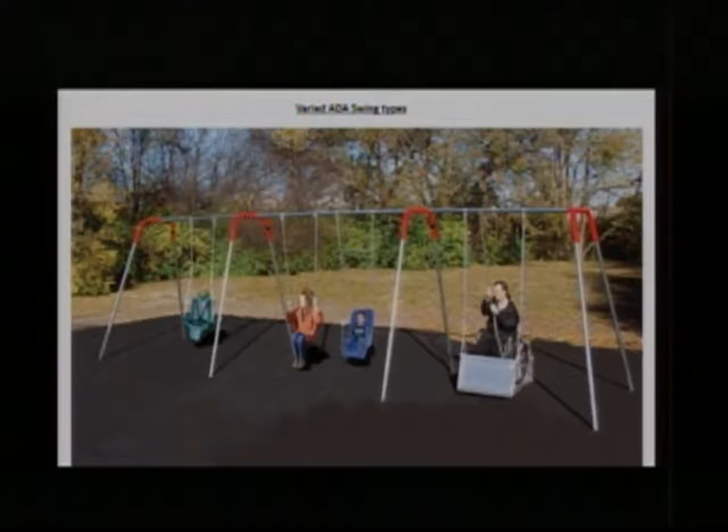Here's another view. You can see those seat type swings. And they do have a place, and we'll likely purchase some of those to add to the other playgrounds around town, so we do have other accessible playgrounds. But just this would, at least at this point, be our only swing that would be here, wheelchair accessible.

Like I said earlier, we have no swings. I know of none, private or public, in the city of Moscow that are wheelchair accessible. ADA is a heavy focus in our Parks and Rec master plan. It's also going to be one of our primary focuses of the update that we're working on now.

This sort of got ahead of us, but we evaluated the request. We saw that it didn't interfere with the direction that we were going. We would have gotten to this point anyway. So, I mean, why not?

This swing is needed. The cost, and it's spendy, it's about $34,000, and that includes the safety tiles. It's not just the swing, you have to enclose this.

It is planned to be at East City Park, and this is an unsupervised location, so it requires a fenced-in area, and that's not to keep people out, as in a trespassing type thing.

It's meant for safety, so a pedestrian isn't walking in front of the swing, and you saw the size of it, and that's metal, you would get hurt. It's not in this budget, the fiscal year 18 budget, but it does meet the council's resolution 2017-07, authorizing the use of the Hamilton funds set aside specifically for playground purchasing and installation.

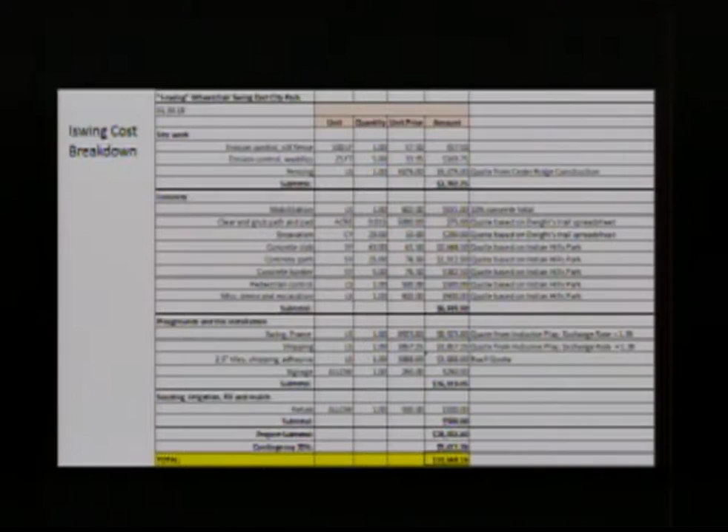Like I mentioned before, about $34,000 will take care of this. Staff recommendation is approval of purchase and installation cost of the wheelchair accessible swing in East City Park, using an estimated $3,000 in donated funds from the Moscow High School Buddy Club and the remaining funds from the Hamilton Fund, for a total of about $34,000. And that's all that I have.

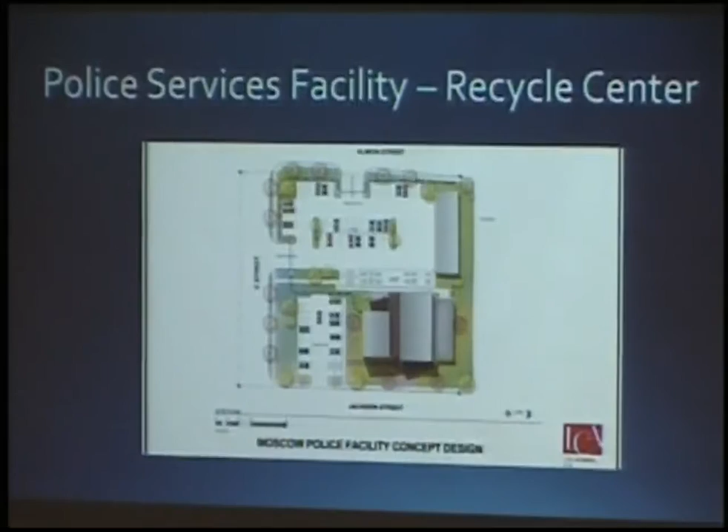During that same period, council determined they wanted C Street to go through. C Street is a substandard street; there's no parking allowed on it. It's merely a connector between Jackson and Almon. So, should a police services facility be constructed on that site?

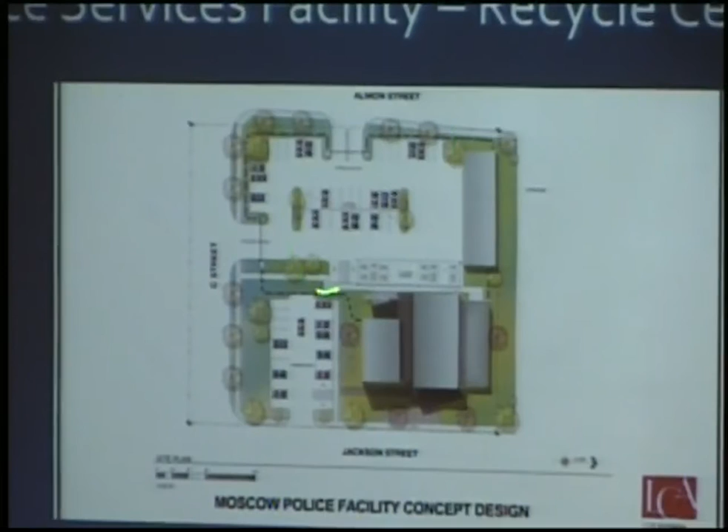This is the basic configuration: the main area, the public parking lot, secured parking lot, and a storage facility. There are some additional floor plans you can't see from here, but if you'd like to see them in more detail, we can certainly provide those.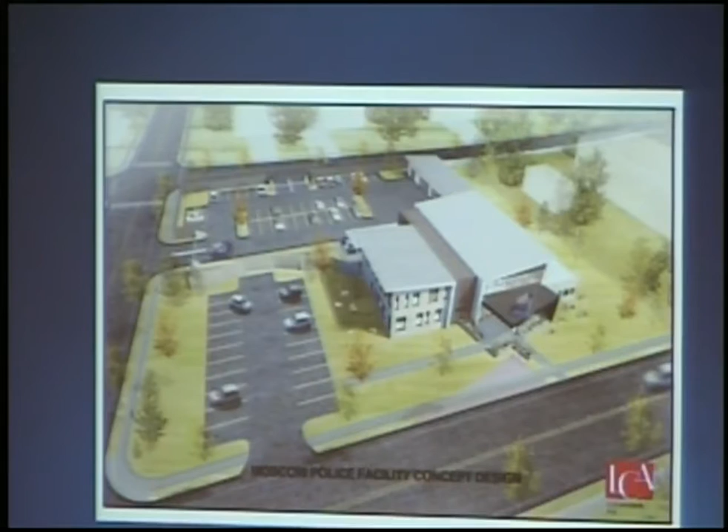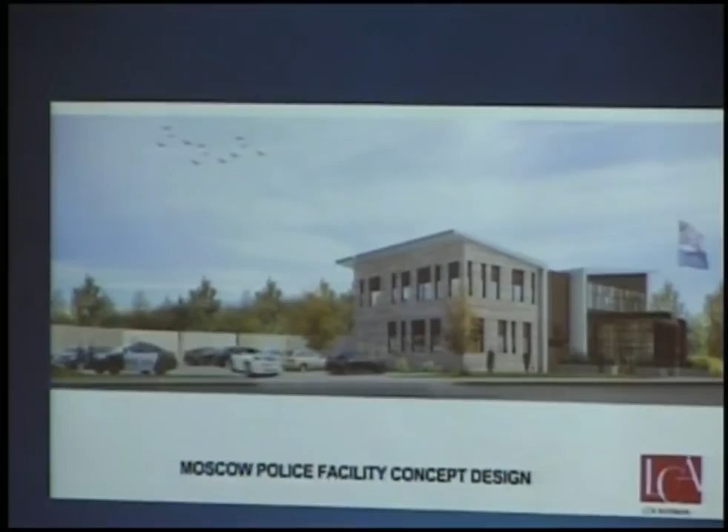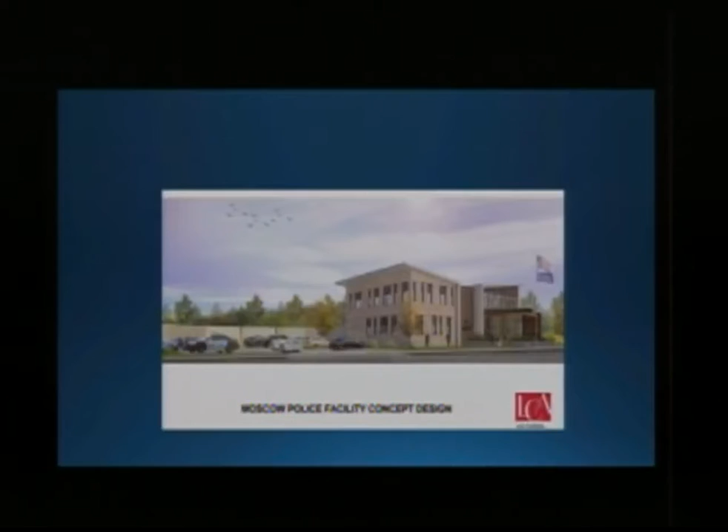And then on to some elevations. This is looking in a westerly direction off of Jackson Street. This is an elevation looking to the northwest, I believe. Another elevation. Again, this is all conceptual design; it has not been designed for construction at this point. That is something that will be done should we be successful with our bond election.

So as part of that, obviously moving the police department out of the 4th Street location would leave that building available for repurposing or sale. At the beginning of this process, we were on the fence about it. We thought perhaps it could be resold and offset part of the bond issue or cost of constructing the new police station.

We looked at that and at the existing city facilities. The Gritman Medical Center purchase, or our proposed purchase of the federal building, was large enough that it would have allowed us to house other city operations there, namely community development, engineering, as well as the information systems department. So we would have taken care of all our space needs for the next 20-some odd years at least.

When that went off the table, we still had the police station we were working on, and it looked like it was going to need to be addressed with a single purpose police station. Secondly, we had the issues of the engineering department, information systems department, and community development currently housed in inadequate space, both in the Mann Building and the Eggan Youth Center. So we looked at whether there was a way we could address those issues as well.

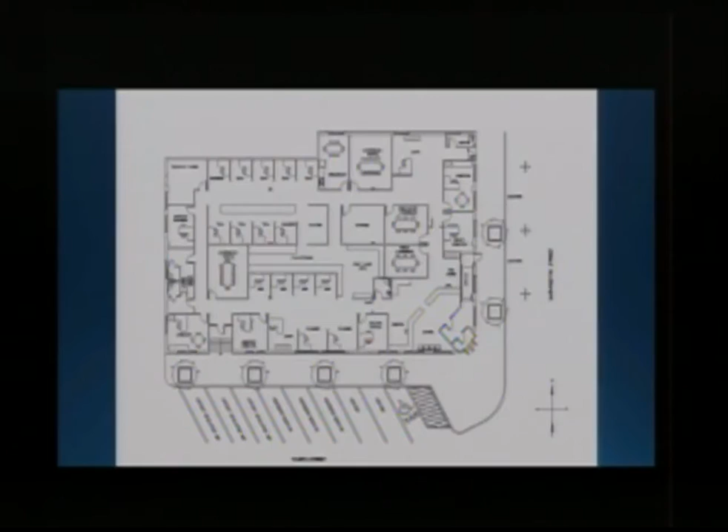So this goes through the same thing I just talked about - I should have skipped ahead of a slide. This is the conceptual design by Associated Architects. This is Washington Street, this is 4th Street, so you have engineering on this side of the building. This is the corner, where you see the police station, and the flagpole is here. This is where the old entrance to the facility was, back when it was J&J Glass years and years ago before the city obtained it.

Right now, there are issues with the only ADA access being back along Washington Street. If you want ADA access to the police station now, you need to go through this secondary entrance. The 4th Street entrance is up steps - there is the lobby entrance, and then there is the police officer entrance. So it could be reconfigured in this way to allow ADA access, and be reconfigured inside to meet the needs of engineering and community development.

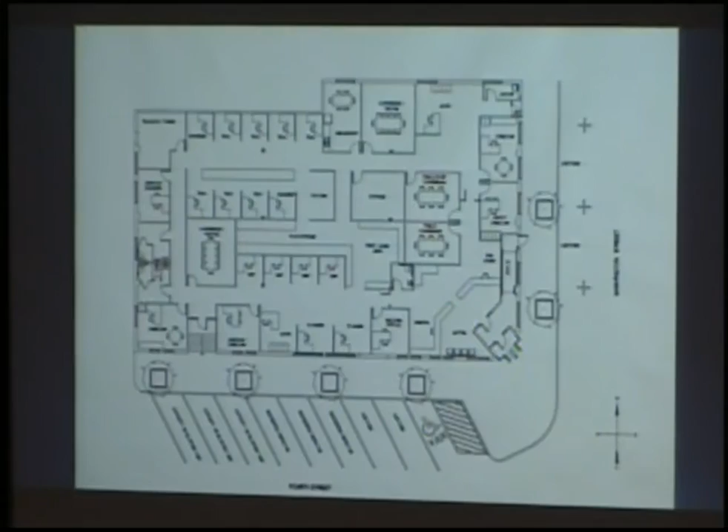So what is the cost of these projects? As you recall, the initial proposal was a $10 million bond issue. We've updated the numbers - you saw in the first discussion in 2015 it was about $5.5 million for a police services facility. That is inflated, as you know from city projects - we've seen an increase over the last year to two years of 15 to 25, 30% because of the market. So we've re-estimated that at just shy of $7 million for a new police facility.

4th Street renovation would be about $1.4 million, which would renovate it for use by engineering and community development. The Mann building, fortunately, is the cheapest part of this because it is structurally sound, and the interior would be used for offices, which it is used for today, and also for some additional record storage for City Hall. It can be renovated fairly cheaply, so the proposed bond issue would be about $8.5 million.

As the mayor indicated in a press release last week, council authorized us to move ahead in the fiscal year 2018 budget to again move forward with the bond issue addressing those facilities' needs. The reason for the first delay from fiscal year 17 to fiscal year 18 was because of the potential for working with Gritman on the federal building. That fell through, so we fell back and worked on the original proposal.

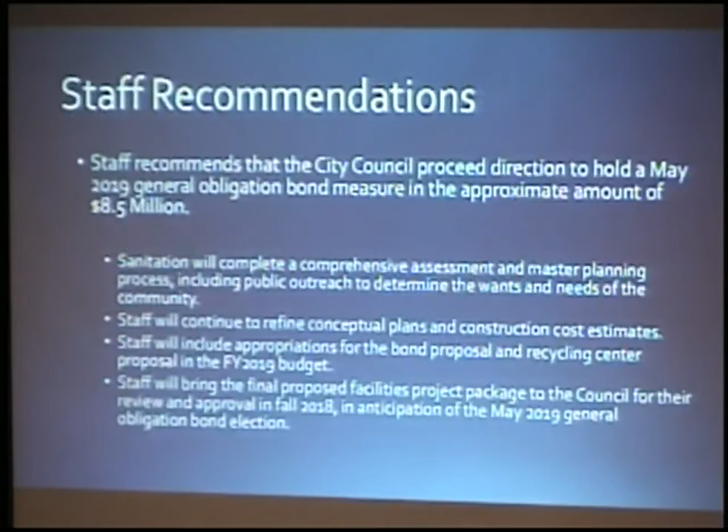Police services design in 2019, bid in spring of 2020, construction about a year from spring 2020 to spring 2021, occupancy in the summer of 2021. We would be working on the 4th Street renovation prior to the police moving into the new facility, and then 4th Street renovation, occupancy, Mann building after that.

So in the summer of 2022, should this be approved and we're able to move forward, we should have the complete renovation and reoccupancy, repurposing, and construction of a new police station completed.

So our recommendation at this time is that staff be directed to, in the FY 2019 budget, hold a May 2019 GO bond measure in the approximate amount of $8.5 million.

In the meantime, we will complete the sanitation assessment and master planning process, including public outreach, so that we can determine what services the community wants out of their recycling center, but also determine an optimal way to deliver those services. Secondly, we will continue to refine the conceptual plans and construction cost estimates, so at the time we're able to develop a budget and proceed with the bond election, we have good, accurate numbers. We believe we have those today, but again, we're talking a year down the road.